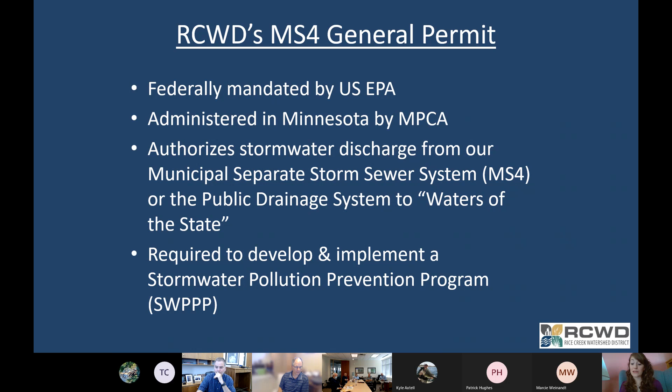The current MS4 permit became effective on November 16th of 2020. As part of the permit reissuance process, the district completed a two-part application for continued coverage under the new permit, which included updating the district's SWPPP. The district also proactively revised Rule C stormwater management to align with the 2020 MS4 permit public linear water quality treatment standards. The MPCA reviewed the district's application for completeness and recently determined that it is complete. So one of the next steps is for the MPCA to place the district SWPPP on a 30-day public notice period, and they will follow up with the remaining steps to receive coverage under the new permit.

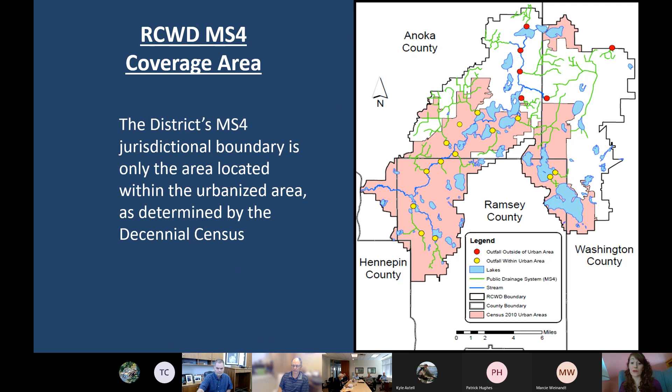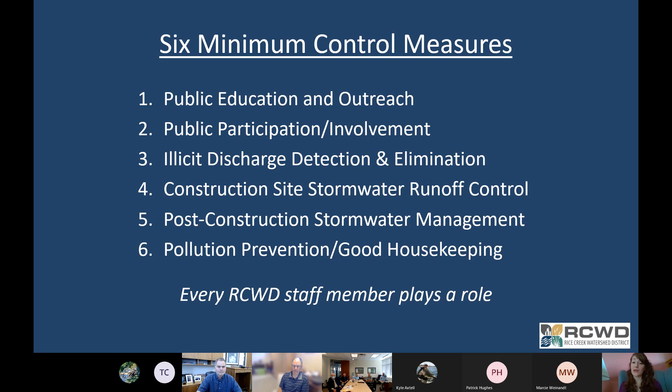The MS4 permit requires us to develop a stormwater pollution prevention plan or SWPPP that addresses 6 minimum control measures. The SWPPP determines our strategies and best management practices for each of the 6 minimum control measures, which are public education and outreach, public participation, illicit discharge detection and elimination, construction site stormwater runoff control, post-construction stormwater management, and pollution prevention and good housekeeping. All staff at the district help implement BMPs to meet the MS4 permit requirements. It's a team effort here.

The next few slides are highlights from our SWPPP and 2020 MS4 annual report, which is on page 34 in your packets, and shows how we've addressed the 6 minimum control measures. The first one is, again, public education and outreach. In 2020, we continued to write several community newspaper and newsletter articles for communities in our district, and we created targeted materials for specific groups like utility bill inserts.

We did see a decrease in the use of our website and Facebook page, likely due to the pandemic. For example, in 2019, 23,000 people used our website and only 14,751 used it in 2020. Our future website update may help to increase the public's usage of our website and ensure that it's meeting their needs. We also transitioned to hosting virtual workshops and provided financial support and assistance to district partners who were also transitioning events to virtual platforms.

Despite the pandemic, there were many Blue Thumb and Lawns to Legumes virtual workshops, turf alternative workshops, and smart salting and winter maintenance virtual workshops that had good attendance. We also provided our CAC a virtual watershed tour that was made available to the board and to the public. We virtually participated in the Children's Water Festival, and we also co-hosted a webinar on actions that residents can take to improve water quality.

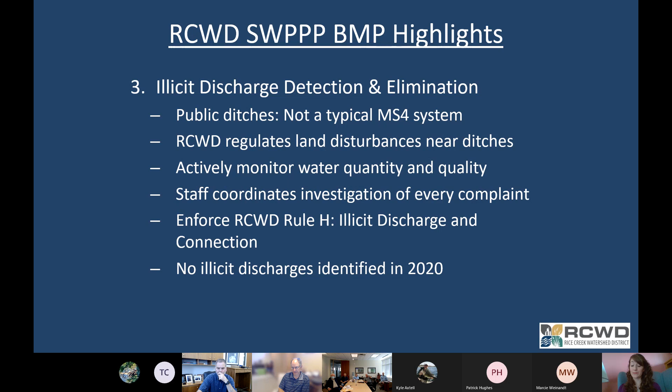The fourth minimum control measure is construction site stormwater runoff control. We actively implement and enforce controls through our district rules, and we follow our construction site inspection enforcement response procedures for any violations.

In 2020, there were 84 active construction sites greater than 1 acre. We also completed 389 site inspections for sites greater than 1 acre and sent out 118 violation notices, most of which were through inspection reports.

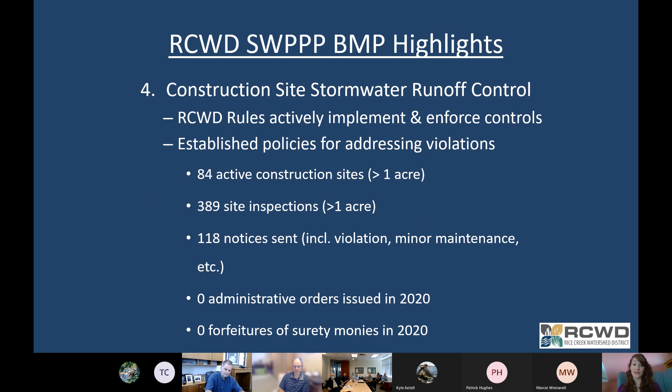5 of the notices were 10-day work without a permit notices or enforcement letter notices. On the whole, our numbers for 2020 are a bit lower than in 2019 due to the pandemic.

The fifth minimum control measure is post-construction stormwater management in new development and redevelopment. We actively implement and enforce this through our permit review and inspection processes, especially through Rule C stormwater management. We've also required ditch, drainage, and utility easements for some projects, and require stormwater operation and maintenance agreements for required stormwater treatment BMPs.

In 2020, we reviewed about 57 projects that required permanent stormwater treatment BMPs, which is down by 10 from 2019. As part of the newly reissued MS4 permit, in 2021 we will need to map these structural stormwater BMPs through our permit program, which we'll be able to do through the new MS4 front database.

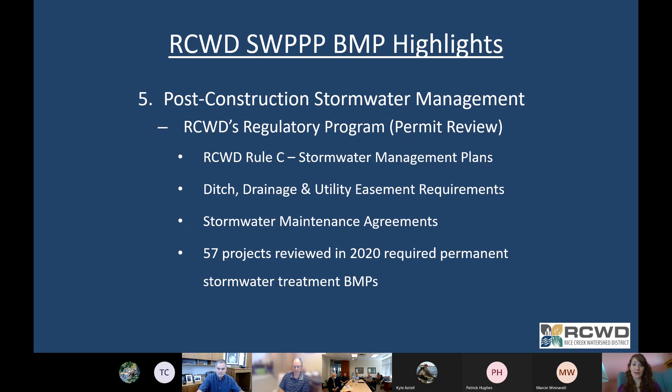The sixth minimum control measure is pollution prevention and good housekeeping. This measure is regarding how we maintain our MS4 to prevent pollutant reduction or to reduce pollutant discharges. We meet this through our routine inspection and maintenance of the public drainage system and annual inspection of district-owned facilities.

In 2020, we completed at least 1 inspection of all district-owned facilities applicable to the MS4 permit and outfalls within our MS4.

Lastly, in addition to the minimum control measures, as part of the MS4 annual report and SWPPP, we also report on discharges to impaired waters with an approved total maximum daily load, or TMDL. We have designated categorical waste load allocations for the Hardwood Creek TMDL and the Golden Lake TMDL, and are required to report on any completed activities that would help meet these allocations.

Hardwood Creek is impaired for biota, dissolved oxygen, and total suspended solids, and Golden Lake is impaired for excess nutrients.

After the MS4 permit was reissued last November, one TMDL was added to the list that the district is required to report on during this new permit cycle, which will be documented in the 2021 MS4 annual report.

The added TMDL is the Southwest Urban Lakes TMDL, which includes East Moore Lake, Island Lake, Little Johanna Lake, Long Lake, Pike Lake, and Valentine Lake.

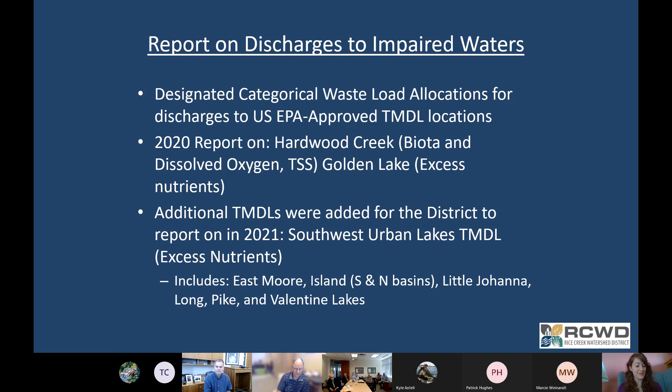Go ahead, Mike. Just an informational one for me, on page 47 of our packet is question 60. You enter the total number of structural stormwater BMPs, outfalls, excluding underground outfalls, and ponds within your MS4.

And we only have one pond. I was surprised that we only have one pond. That pond is in whatever we've got, a storm system that we've dug out. Here, talk to me about one pond.

Yeah, that's a good question. I believe it's one off of 61. Let me see if I can pull that up really quickly. Where's the one that goes into Bald Eagle? I think so. Let me see if I can pull that up.

So I know we included it in the BWSR annual report, because something new that we've been doing to help with the documentation of our compliance with the MS4 permit is this year we started adding some of the information into the BWSR annual report that we have to complete, so that we have a central place for everyone to input information related to the MS4 permit, which is great that we can do that.

Let me see here. I can pull it up really fast. So I believe it's off 61. Okay, here we go. Yep, it is Ramsey Washington Judicial Ditch 1 and Highway 61 Treatment Pond.

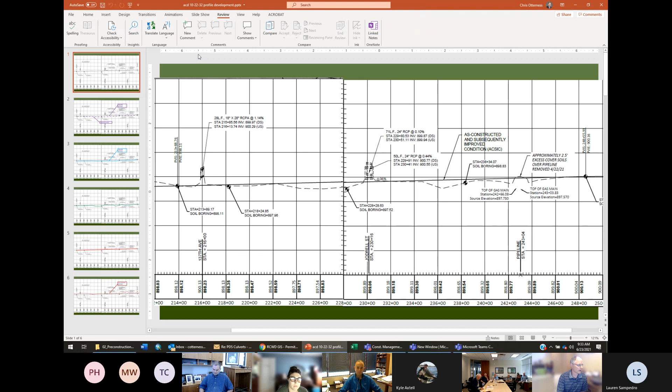Sure, Madam President, I will share my screen. I put this information into a PowerPoint to make it a little easier. What I wanted to show you is the profile from our report, actually two different pages stitched together because they meet on each side near Jodrell Street. So in order to get the full picture of how we arrived at our profile specifically near Jodrell Street, which is the area I believe Perry Wagaman had the most concern about, we wanted to go over our rationale.

The solid line shown here is the as-constructed, subsequently improved condition that we determined from our report. The dashed line is the current channel bottom that was surveyed in October last year. This current channel bottom is essentially where the district's contractor, Scandia Trucking, Roger Ideen, dug to the bottom or hard pan of the ditch. When he's out there excavating, he feels around with his excavator down to where he hits basically a sand bottom, and that's where he excavated to. That is where the dashed line is on the map.

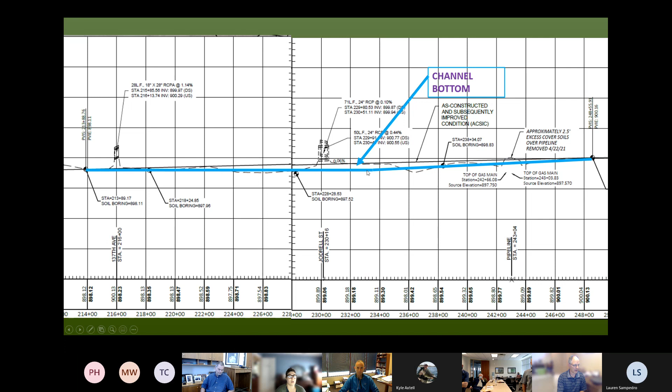Another option we could look at is what the gradient would be if we just followed the channel bottom that we surveyed here. You can see it kind of goes up and down and up and down, and you may wonder why that's occurring, why it looks like that.

I'll note a couple of things - on either side of Jodrell Street there are some larger or wetter areas where it appears, when you look at an aerial, that there may be some deeper peats in those areas. When I say deeper peats, I'm not talking about 15 or 20 feet, I'm talking about maybe 5 or 6 feet deep, and those areas do coincide with these lower areas on the system here.

What I believe is that when either cleanouts have occurred or just from general washing out of the ditch, there's probably some peat in these areas that is no longer sitting in the ditch. Presumably when they dug the ditch out, they likely wouldn't have dug it up and down like this - they would have dug something with some sort of positive gradient to it. That's how we arrived at the grade we provided and recommended as the as-constructed condition here.

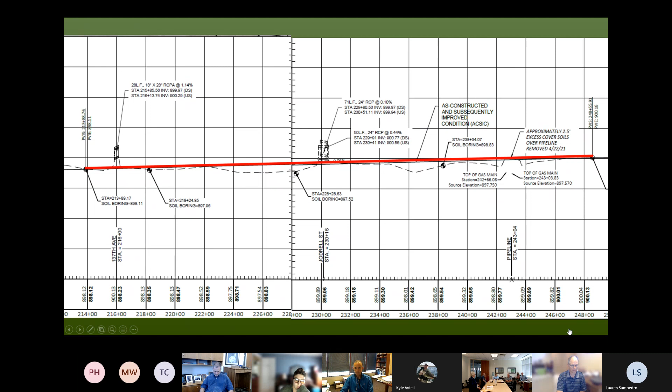Go ahead, I'm sorry. Yeah, first of all, Chris, these high areas that you're describing that are due to the pipelines or such, that's all in the profile in the report, but it doesn't have a written narrative. Is that what you're telling me?

That is correct. Each one of these is shown as being higher than the as-constructed elevation within our mapping. We just didn't provide a narrative of all these locations in the report, again, because that wasn't the purpose and intent of the report.

I just wanted to make it clear that when you say it's not in the report, it's not in the written narrative, but it is in the actual profile diagrams and mapping, and somebody who understands how to read those things could find that. But the general public would not know, and isn't going to notice that right away unless you scrutinize the diagrams. So I just want to make that clear that it is in the report, although not in narrative.

Go ahead, Manager Wade. Well, I didn't know we were going to get to discuss it today, and I don't have any of my stuff with me, but I've got other things I was going to show the board. Different engineering and a bunch of other issues that I think aren't necessarily wrong, but that I think should be understood and included in this.

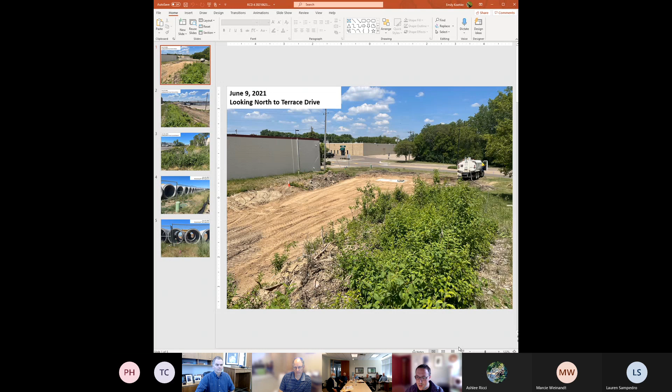There we go. Everybody see this just fine? Yes. Okay, so this was back in late May, right around Memorial Day. Work began at the site to install the pipe between County Road C and Harris Drive. On June 9th, I got down there and took a look at some of the early work after the clearing and grubbing was done. The contractor started near the north end up at Terrace Drive.

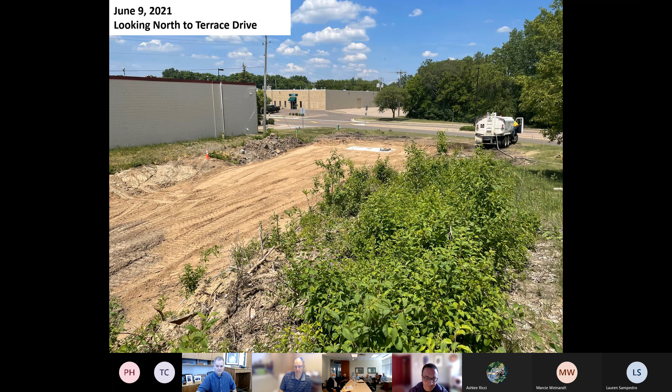This view is looking at Terrace Drive. You can see the concrete vault present in the fill area, a 12-foot wide box vault that marks the transition between the new pipe and the old existing box culvert that carried the ditch underneath Terrace Drive to Oasis Pond, just off behind the trees there. So you can see the work is well underway.

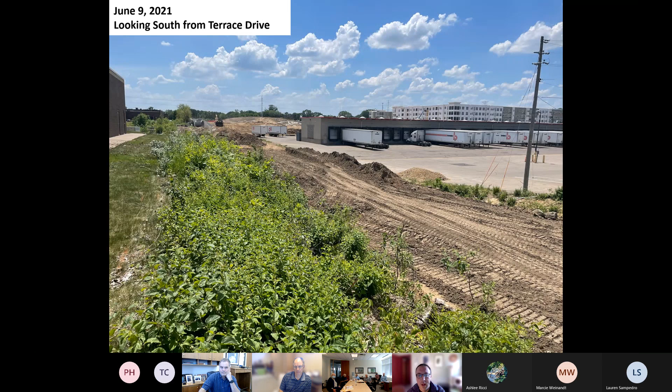This is looking then from that point back south toward some of the areas where you can see some of that redevelopment occurring behind the truck terminal. And they were making good progress back then. Just yesterday, I stopped out again to see where they're at.

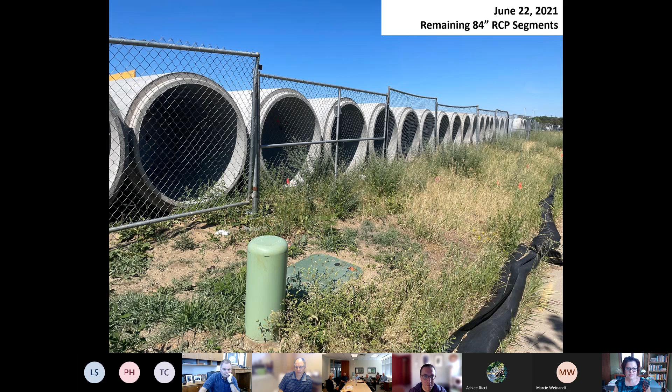To give you an idea, those are 8-foot high fences there. So they're big sections of pipe. You can walk right through them. So, pretty exciting to see that work getting completed. Let me stop that sharing. So again, just wanted to give you that update of where things are at. And I think the plan was for the contractor to be wrapped up here by the end of the month with the pipe work. And it looks like they're on pace to do that.

But the purpose of this agenda item, ultimately, the city of Roseville has requested that the Watershed District consider making partial reimbursement for some of the project costs. As you'll recall, the bid for that portion of the work, the pipe and mass grading, was right around $2.5 million, which the city of Roseville accepted. Their contract with Meyer Contracting also includes approximately another $1.5 million of work for surface improvements to the area, such as a trail, lighting, and landscaping. So if you look through the paperwork, it's a much larger contract overall.

To date, the city has expended, as of a couple weeks ago, almost $770,000, which included much of the pipe that was placed on site. I think they've gone far past that at this point in time. But the city had requested that we consider issuing reimbursement of 50% of our ad valorem contribution to the project. Again, as you may recall, we had $640,000 budgeted in our 2021 budget to cover the ad valorem contribution of the project. There's another $450,000 in RCD4 water management district funding that would ultimately be transferred to the city upon receipt. Those funds are being collected over a period of 3 years, so that will be a slower process to get those carried over to the city.

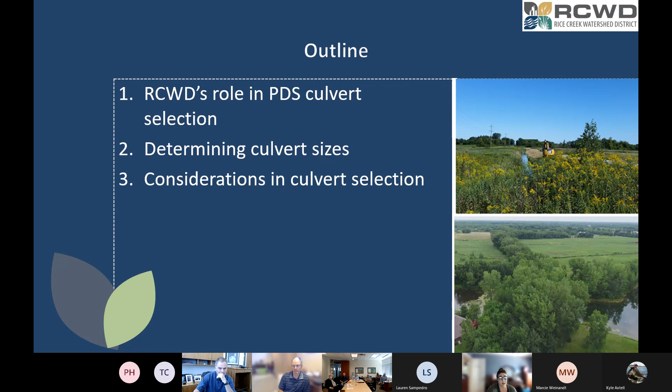It's still morning, so good morning, Madam President, Board of Managers. Today I'm joined by Chris with Houston Engineering, our district engineer, to discuss culverts in the public drainage system. So here's the presentation outline. I'll start by touching on the district's role in culvert selection as it pertains to a couple of different approaches the district takes. Then I'll hand it off to Chris to discuss how the culvert sizes are determined, as well as some of the factors that are considered in the determination before moving into a couple of comparison slides.

So when does the district evaluate culverts? There are two kind of mindsets that the district utilizes when considering culverts. The first is obviously as a regulator, which is addressed through the district's permitting program, as well as drainage authority considerations. The district's Rule I requires that no work be completed on a public drainage system without first obtaining a permit, in addition to obtaining any requirements under Minnesota Statutes Chapter 103E. Based on the criteria of Rule I, the district considers things like the capacity, function, inspection, and maintenance access of the public drainage system, as well as 103E findings and interim conditions of the project.

The district as drainage authority also has to consider similar criteria as well, and Chris will touch in a little more in depth on those details. Something to keep in mind is that the district has very few culverts that are actually its responsibility to maintain. The maintenance responsibility actually falls to the crossing owner, which is normally either a private landowner or a road authority. So other than permitting, the other time we're looking at them is during the repair process. During the repair process, the engineer evaluates existing crossings and makes recommendations for changes if needed. This includes the private crossings as well as any crossings the district may have installed along the way.

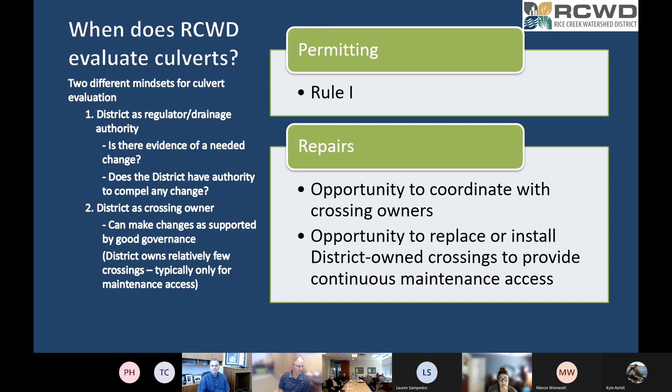As part of this process, it's a really good opportunity, and something the board has been very vocal about, making sure we engage with crossing owners and have as much coordination as possible on the front end about the conditions of the crossings and their future replacement if needed. Other than that, during that same process, as we're looking at where the existing crossings are, we're looking at where our inspection and maintenance corridor is as well. In every repair we've done, we've added additional crossings to ensure a continuous corridor for inspection and maintenance to ease access for the future. We'll turn it over to Chris.

All right, thanks, Ashlee. So the first thing I'll talk about is maybe one of the more obvious questions: what size culvert do we actually need? Or what size culvert does the applicant or other engaged party need to provide related to this work? As Ashlee noted, this could be part of a repair project or part of a permit application review. And there's a number of different criteria we look at, not just one single criteria. One of the first things that's real easy to look at is the size of the upstream and downstream culverts.

If you have a downstream culvert that is relatively small, then having an upstream culvert that is larger may not provide a whole lot of benefit. But it isn't our only criteria, because we might have to evaluate, is that downstream crossing too small, and do we need to make sure that all of these crossings are sized appropriately. So it's just one criteria again.

Next thing we'll look at, and this may require a little bit of modeling, is what is the ability of the culvert to pass a design flow event. And we do have some of this information available readily through the district-wide model and what we've done in modeling the 2, 10 and 100-year events. But we may need to do a little additional modeling in some cases to ensure that what is being designed is going to be sufficient.

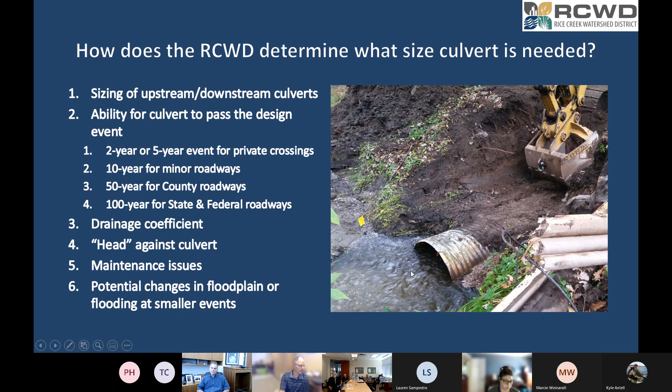Another few notes on design capacity. These culverts are designed to address and have capacity for surface water. We aren't looking at groundwater conveyance with these. The cross section doesn't have to match the cross section of the ditch. For a given cross section, a pipe is actually going to have a greater capacity than the ditch itself because the pipe is smoother.

And we do need to have some of that head against a culvert in order to reduce the amount of maintenance that may be needed on a culvert. We call that cleaning velocity. If you have the velocity too low, the culverts tend to silt in, and then you may have a reduced capacity in that culvert at that point. So we kind of have to balance a number of different things.

And as we're looking at the function of the drainage system, having that smaller amount of head or change in water elevation across a roadway is not a bad thing, and it may not necessarily affect the capacity or function of the drainage system. And so we tend to look at what is the size that is necessary so that upstream head on the culvert, or that water elevation change, isn't going to affect the next upstream culvert and have a cascading effect as you work your way upstream.

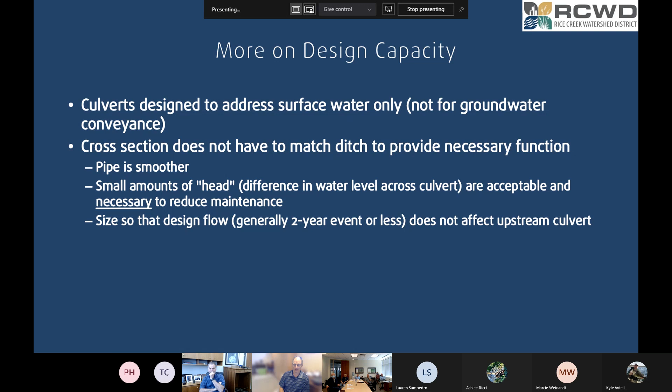Some of the other considerations in the selection, other than the capacity itself, we have to look at the size and material of the culvert. Cost - there certainly can be a drastic change in cost between different sizes and types of culverts. It's not something that's small, and I'll talk a little bit about that in a second.

There also needs to be consideration of long-term cost. Is the kind of culvert that you're putting in going to change the ability to maintain in the future, or the replacement cost in the future?

We look at the location of the crossings, make sure that they're in line with the system and aren't going to result in additional scouring. We also have to look at that elevation, determine whether it's at the as-constructed elevation, how it fits in with the site itself, and what the purpose of the crossing might be, because those are all things that may affect that determination.

And then there's also structural integrity to look at. Certain culverts are appropriate in certain places. You can't, for instance, put a plastic pipe in a crossing that's going to have a 25-foot depth on it, because plastic pipes aren't meant to have that amount of soil on top of them. Likewise, you can't put a large box culvert or even a large concrete culvert in areas with very non-supportive soils. The culverts will have a tendency to sink, and you may be back in there again to replace or rebed those culverts. So those are other things we need to look at.

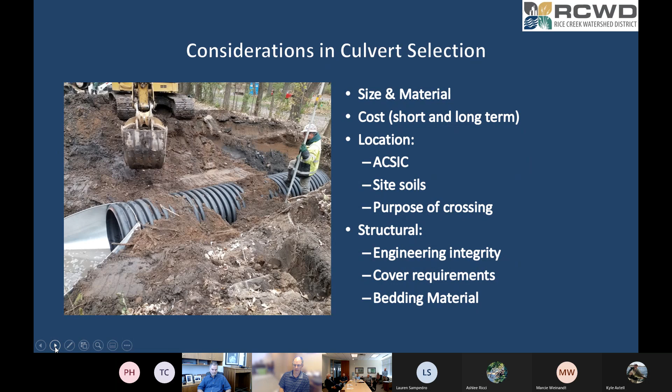Talk a little bit about types of culverts in terms of shape. For the most part, the district culverts are either arch or round pipe, more so the round pipe. There's a few arch pipes in the district here or there, and I'll show you in a bit what those look like and why they're used.

Either case, those can be made out of plastic, metal, or reinforced concrete. And then we also have box culverts along the drainage systems in the district. Again, these box culverts are made out of concrete.

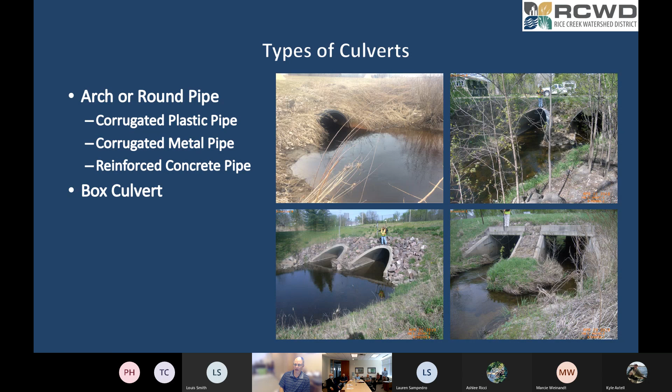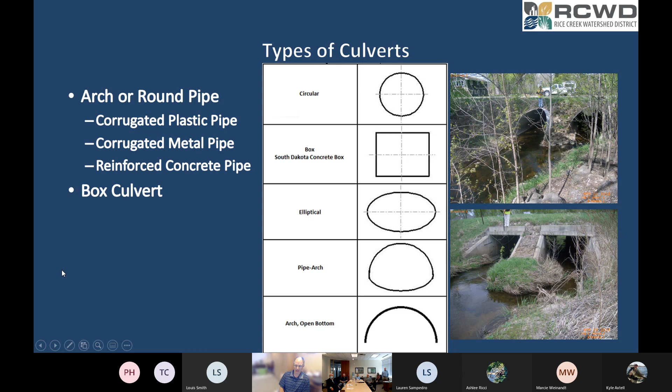A few things regarding culvert shape. We do consider how they perform at different elevations, and we do want to consider that. In most cases, round pipes are suitable. Even though the round pipe at the very bottom doesn't have a large cross-sectional area for the first couple inches, that is not particularly necessary or important for the function of the drainage system.

And again, that differs by where you're at on the drainage system. But again, the most important thing in most locations is that as you get up toward the lower third or middle of the pipe, you do have that greater capacity in those areas to handle flows that are approaching a 1-year or 2-year flow condition or rainfall event.

There are some cases where you may need to look at a box-shaped culvert. That would generally be in cases where you'd have a very high flow capacity need with a low amount of bounce needed to handle those particular locations.

One example that I would indicate would be the culvert underneath 35W on County Ditch 5362. That one, as some of you may be aware, has a weir wall on the end of the box culvert. That was done specifically that way in order to provide a large amount of capacity for that culvert, but also provide a very low amount of bounce even at higher flow conditions. It's worth noting there at that location that we have a dead flat grade upstream over a mile in the ditch there, and that was part of the necessity at that particular location for that condition.

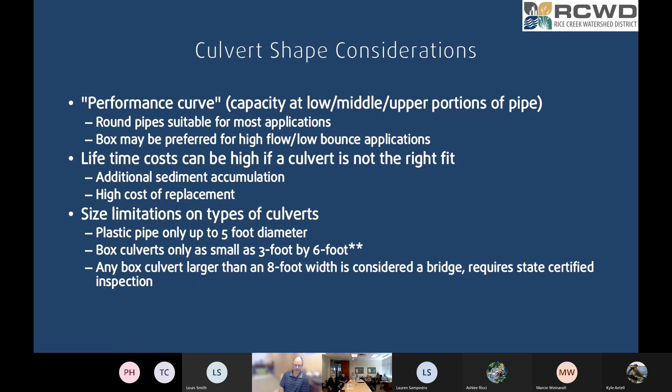Another thing to note is a box culvert larger than an 8-foot width is considered a bridge under the state design requirements, and so it does require a state certified inspection. That has been a rationale for counties and maybe even cities to avoid using a box culvert in certain applications, so that they don't have to have that added cost and effort of having a bridge inspection each year on that type of structure. Next slide.

I'll just compare real quickly a few of the culvert types. If we're looking at a round culvert, particularly like a 36-inch culvert, which we could roughly consider a median size design on public drainage system culverts, we probably have a lot more that are smaller than that, but we have a number of them that are also larger than that culvert.

We have listed this cross-sectional area here. It does have that variable width, and it does fit in channels as small as a 2-foot bottom width. So you do have more ability in a circular one to fit properly within areas that have narrower bottoms. They can be installed with aprons, don't necessarily have to be installed with aprons, and they can be installed with a medium-size excavator.

If you're looking at that comparison to a box culvert, that would be that minimum 3-foot by 6-foot size. It does have about double the amount of cross-sectional area. Not all that area may necessarily be used in that particular application, though. We also have, in this particular example, that if you use a 3-foot by 6-foot box culvert, it would be appropriate only in situations where you would have at least a 6-foot bottom width. So you wouldn't want to have a widening of the bottom to fit that culvert. It does create additional scour concerns there.

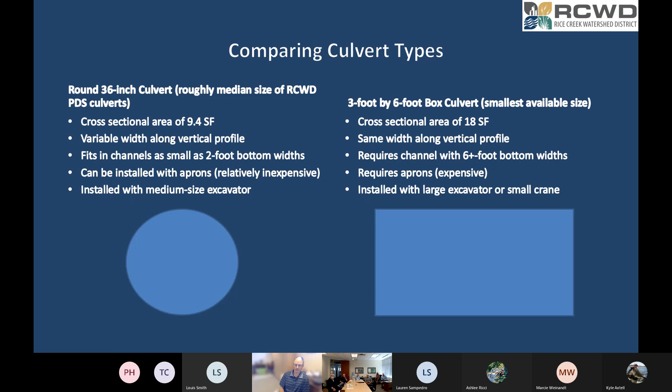Next slide. And then talking about cost, this is just the construction cost for these types of culverts.

If we use that 36-inch example, the metal and plastic pipes are generally about the same size, same cost roughly. You get to a concrete pipe, they're a little bit more generally, and this kind of fits with most sizes, all the way from a 15-inch up to even a 60-inch culvert. This kind of proportion. When you get to a box culvert, you're going to be looking at something that, if you compare it to the plastic or metal pipe, is going to be at least 3 times as costly. And that's just for this particular example.

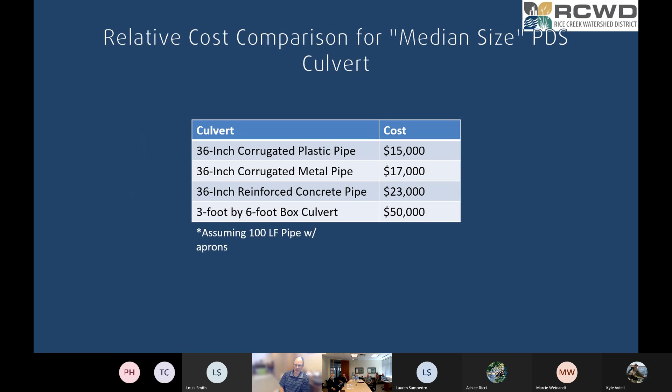If you look at other sizes, if you look at even like a case where a capacity you'd have a 24-inch or smaller in there, that size or that comparison is going to be even greater there. But again, this is just something to kind of give you a rough idea of how these types of structures compare in cost. Next slide.

The Rice Creek Watershed District uses a lot of polyethylene pipe for maintenance and repair projects. We tend to use them quite frequently for driveway field culverts because they have a very long life and a relatively low cost. And where the township or cities allowed it, we encourage the use of polyethylene pipes as well. Some cities and townships require that either corrugated steel or concrete pipes be used underneath the roadways, and that's a choice of the road authority.

Corrugated metal pipes, we sometimes use those in areas where we know we're going to be doing burns, such as at Brown's Preserve, or where flotation may be an issue. Concrete pipe is often required by cities and counties, and of course we use them on a lot of storm sewers. That arch pipe I mentioned before is used where the pipe cover may be limited over the top of a roadway.

On wildlife conveyance, I was actually required one time by the DNR on a permitting situation to install an arch pipe so that it had a flat bottom so Blanding's turtles could cross the roadway. I'm not sure exactly how the turtle would know enough to go through that particular flat bottom culvert, but we did that.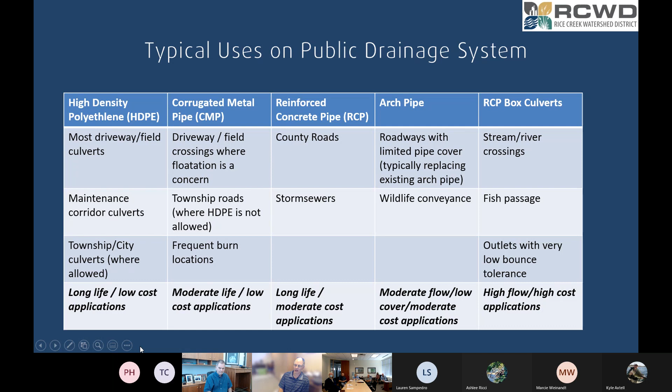So a few conclusions and takeaways. There are a lot of factors that go into determining the sizes, types of culverts, shape, and material. Really there is no one size fits all solution. We utilize a multitude of different pipe types and sizes throughout the district in our repair projects, and the road authorities also utilize that as well.

Ultimately, when we review a permit, we are looking at whether the proposed crossing will maintain the capacity of the drainage system as required to have a functioning drainage system. But we do not get into the detail of describing what kind of shape or material they need to use in those applications. That really becomes a decision of the owner of that pipe, which is the road authority, or in some cases, the private landowner.

Flow efficiency is most important in these cases, generally in the middle of the culvert, with some exceptions. We do not recommend that the district have any sort of policy or stated preference for a specific culvert type, because there is a need to fit the situation, so it would not be advisable to have that policy stated. Rather, we'd recommend that district staff and the district engineer provide recommendations on a case-by-case basis, because every crossing is going to be different.

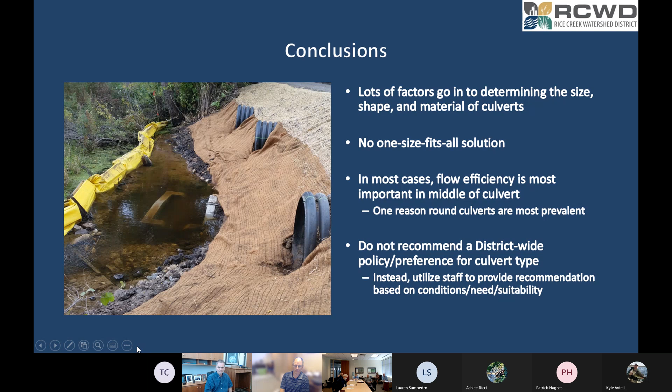And I believe that's all I had, and I can address any questions, and Ashlee can also address questions as well as you may have them.

The only thing I'd like to know then is, we really have no legal basis at all—we can't tell a city or anybody else what size to put in or what to put in, is that correct? Madam President, we can tell them what kind of capacity they need to provide.

Under the statute, they are required to not provide a crossing that's going to serve as an obstruction to flow on the system, so we can dictate that to them. What happens in the permitting process often is that the applicant may come to us and say, well, we have this size here, what size do you need? So we may look in the model to help provide some guidance on that.